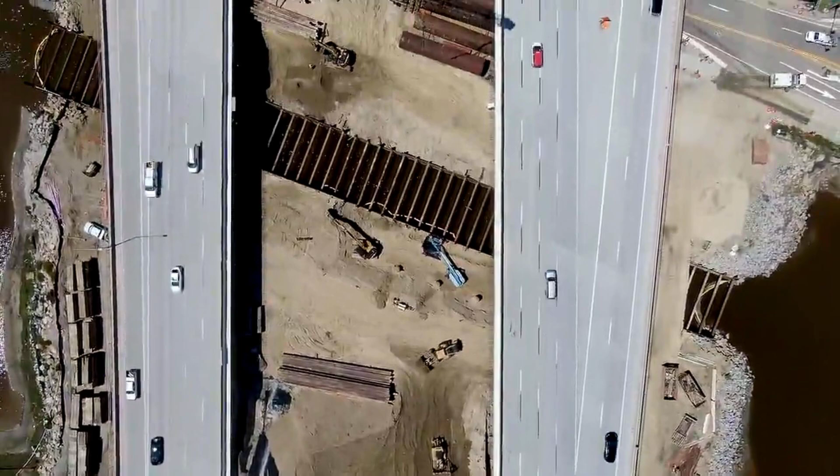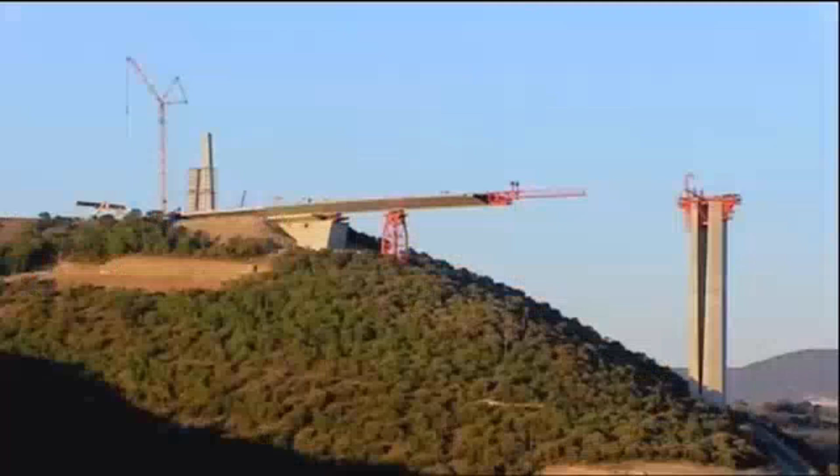America once built the world's longest bridges in just a few years, on time and on budget. Today, the same country takes decades and spends billions more, only to finish projects like the Bay Bridge almost 400% over budget, while Europe quietly delivers feats like France's Millau Viaduct with a fraction of the delay and cost. This isn't just a headline, it's the reality that shapes daily commutes, drains public funds, and leaves vital infrastructure crumbling.

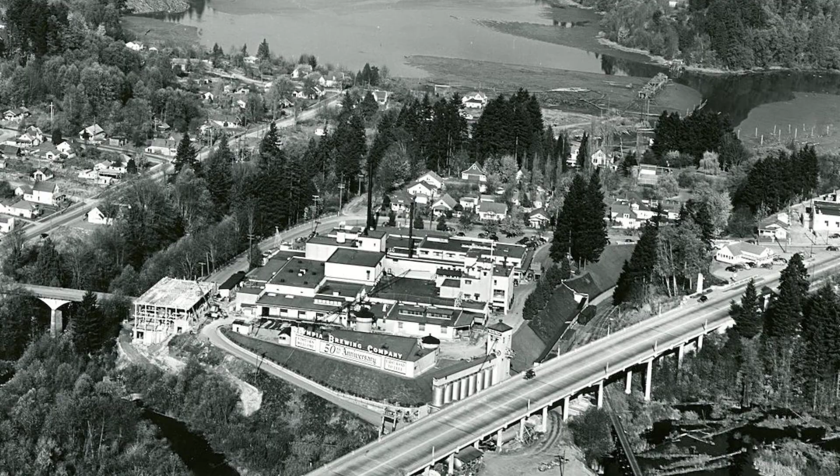So why can't America build bridges like Europe anymore? And what changed since its golden age? The real answer starts with a series of shocking comparisons, revealing a decline nobody expected.

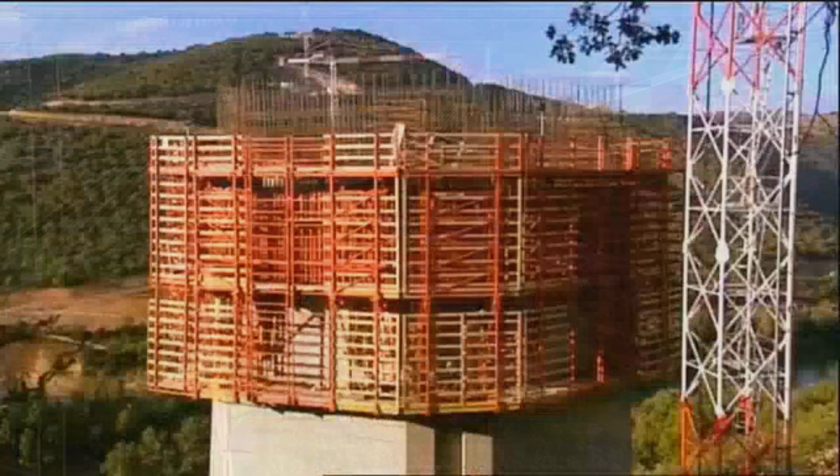Start with two bridges, both record-breakers in their own right. France's Millau Viaduct, the tallest bridge in the world, opened in 2004 after just 13 years from approval to completion. The final bill? About €394 million, just 10 to 15% above the original estimate.

Now look at the new eastern span of the San Francisco-Oakland Bay Bridge. Planning began in 1989. By the time it opened in 2013, the project had stretched to 24 years and ballooned to $6.5 billion, nearly 400% over the first budget. That's not a rounding error. That's billions of dollars and more than a decade lost.

This isn't just a fluke. European megaprojects like the Øresund Bridge, connecting Denmark and Sweden, finished on time and within budget after 5 years of construction. Meanwhile, American projects routinely run 50 to 200% over budget, with timelines measured in decades. The numbers tell the story. Where Europe expects a 10 to 20% overrun, the US faces cost explosions that can quadruple original estimates.

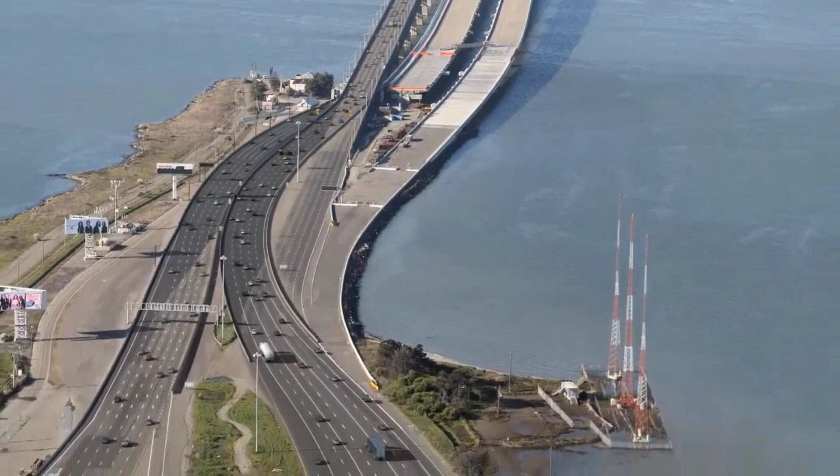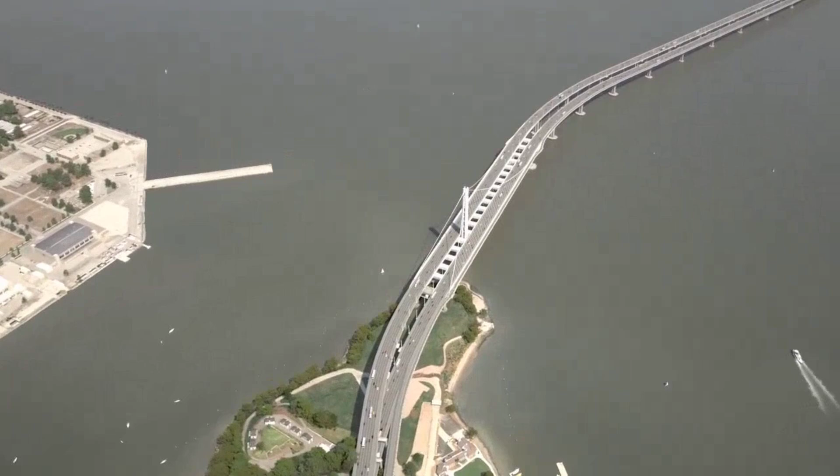For commuters, that means years of detours and delays. For taxpayers, it's billions spent for every mile of steel and concrete. The scale of the gap is hard to ignore. Two bridges, two continents. One delivers on time, the other delivers excuses and invoices. The question is, how did this gap open up, and why does it keep growing?

In the middle of the 20th century, American bridge builders set the pace for the world. The Golden Gate Bridge, spanning more than a mile across the churning waters of San Francisco Bay, opened in 1937 after just 4 years of construction. Its Art Deco towers and sweeping cables became a symbol of national confidence.

By the 1950s and 60s, the United States was pouring concrete and steel across rivers, valleys, and urban divides at a rate unmatched anywhere. Interstate highway bridges, like those crossing the Mississippi or the Ohio, often went from planning to ribbon cutting in as little as 3 to 5 years.

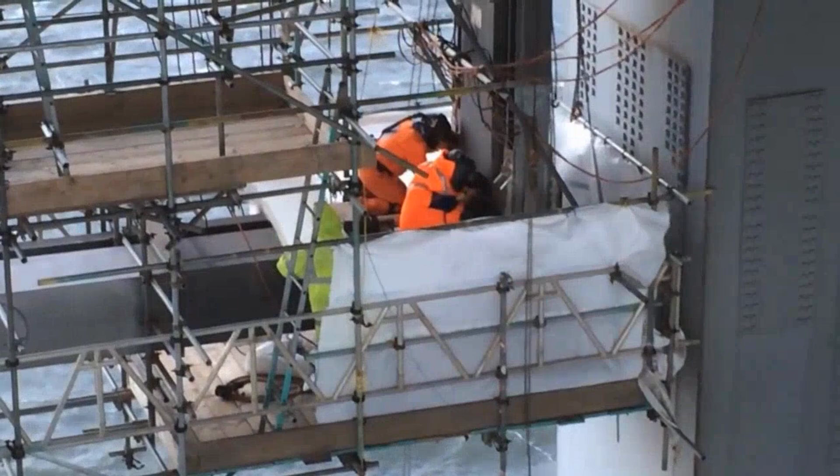Engineers and construction crews worked with a directness that seems almost impossible now. Designs were bold, timelines tight, and budgets usually held. The Brooklyn Battery Tunnel, the Mackinac Bridge, and hundreds of lesser-known spans rose in quick succession, driven by a sense of urgency to connect cities and regions.

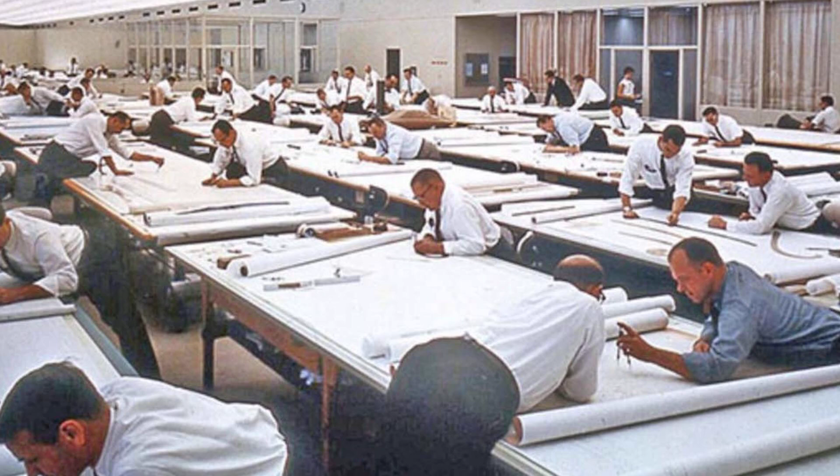State departments of transportation kept in-house teams of engineers and designers who saw projects through from concept to completion. Contractors drew on a deep bench of skilled trades, many trained on the job and eager to take on new challenges. Back then, the question wasn't whether America could deliver a bridge on time and on budget, it was how soon the next one would open.

The country's infrastructure ambitions ran on a kind of relentless optimism, powered by technical know-how and a willingness to take risks. That era now stands as a benchmark, a reminder that slow, costly delivery isn't a law of nature. For decades, America built fast, built big, and built well.

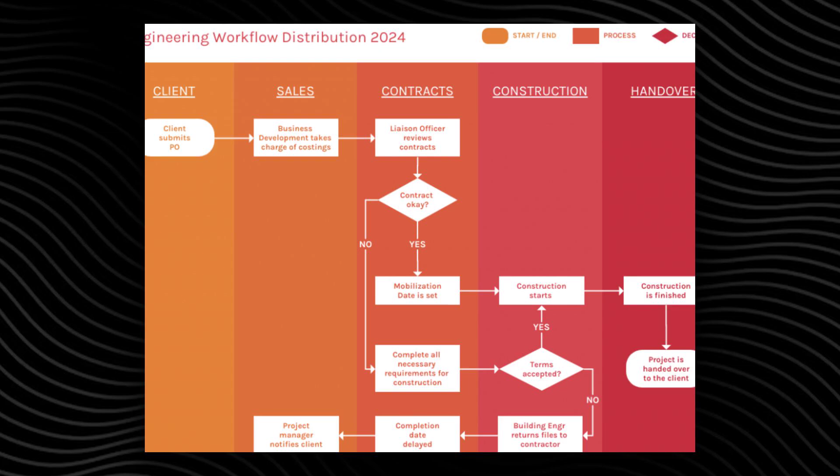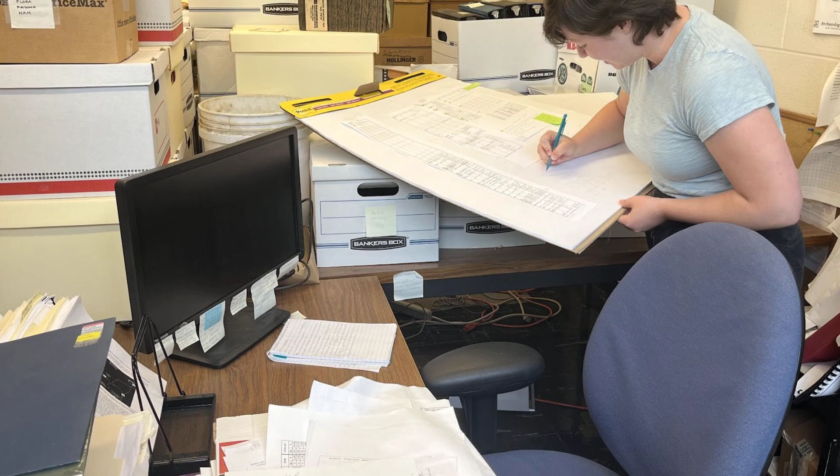Before a single crane arrives on site, most American bridge projects are already years behind. The first hurdle is the environmental review, an obstacle course of paperwork, hearings, and agency sign-offs. Under the National Environmental Policy Act, or NEPA, a full environmental impact statement can stretch across 4 to 7 years for a major bridge. That's before accounting for parallel reviews from the Army Corps of Engineers, the Coast Guard, state regulators, and local authorities. Each step adds more studies, more meetings, and more opportunities for delay.

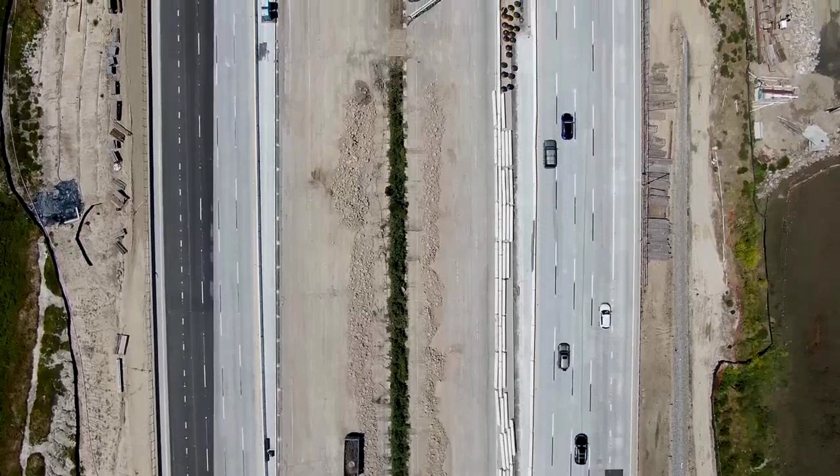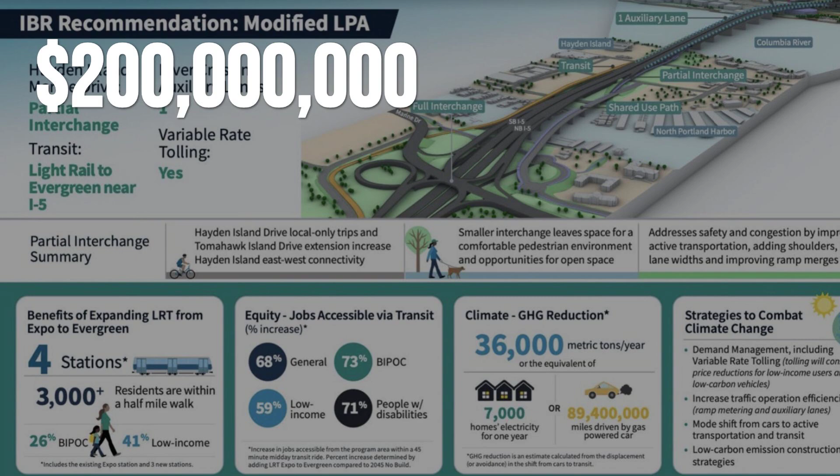A single lawsuit can halt progress for months or even years, as competing interests battle over route alignment, endangered species, or noise impacts. The Columbia River crossing between Oregon and Washington burned through over $200 million just on planning and environmental review, only to be derailed in court before a shovel hit the ground.

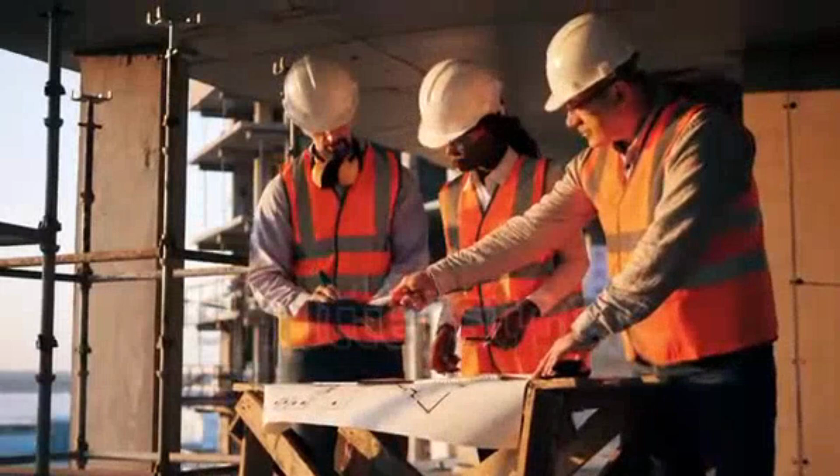In Europe, these reviews are bundled and time-limited, with a single lead agency shepherding the process. In the US, the process is open-ended, with litigation always looming. The result? Bridges wait in limbo while costs climb, and communities grow impatient for relief that never seems to arrive.

A bridge might be designed and approved, but the money to build it does not always flow when it is needed. In the United States, funding for major bridge projects comes in annual installments, controlled by Congress through the federal budget cycle.

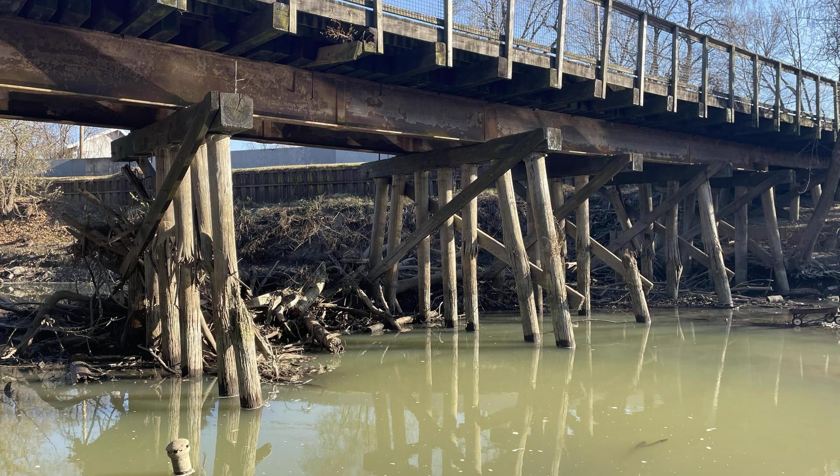Even with the $1.2 trillion Infrastructure Investment and Jobs Act, most bridge dollars are released year by year. A project can stall for months if Congress delays appropriations or budget fights hold up the next tranche of funding. For states and contractors, this means stop-start schedules. Crews ramp up, pause, and scramble to restart, with each break adding cost and eroding momentum. There's no guarantee the full amount will ever materialize, and overruns can pile up as projects stretch over multiple budget cycles.

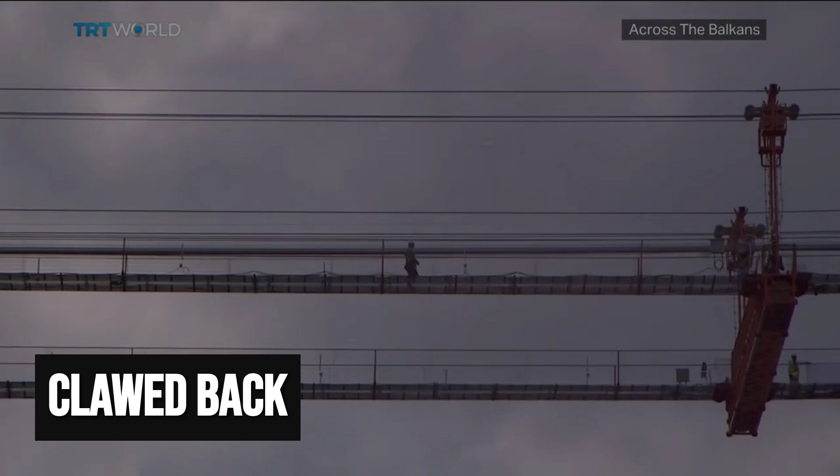Europe takes a different approach. The European Union's Connecting Europe Facility, for example, commits funds up front, tied to strict project milestones. If a bridge project misses a deadline, unused money can be clawed back and future support is at risk. In 2020, the EU withdrew funding for Danube bridge upgrades after progress stalled, enforcing a use-it-or-lose-it rule. This system keeps projects moving and holds planners accountable.

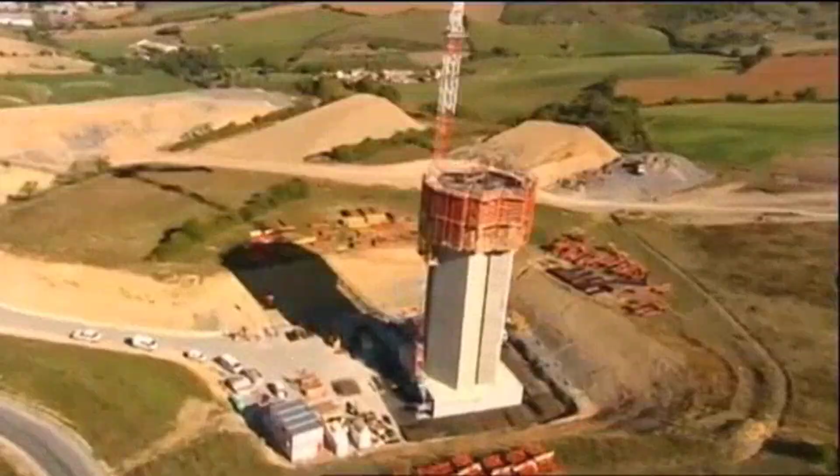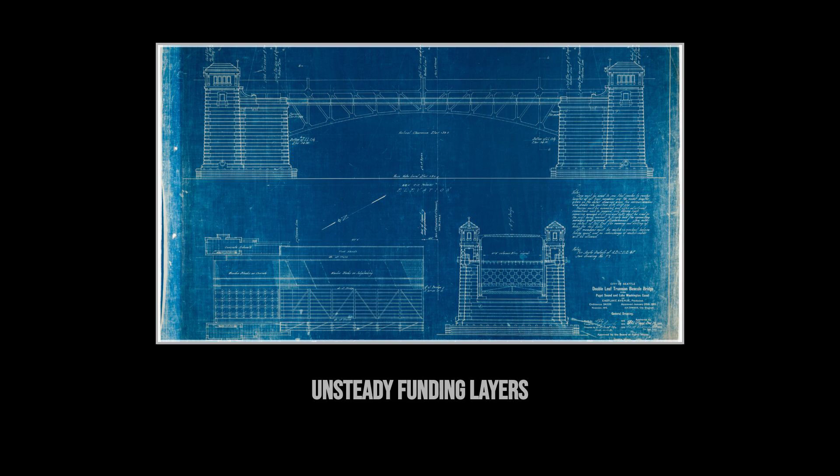In the US, without hard penalties for delay, projects can drift, waiting for the next budget, the next vote, or the next round of paperwork. The result is a funding fault line that runs beneath every American bridge plan, making steady progress the exception, not the rule.

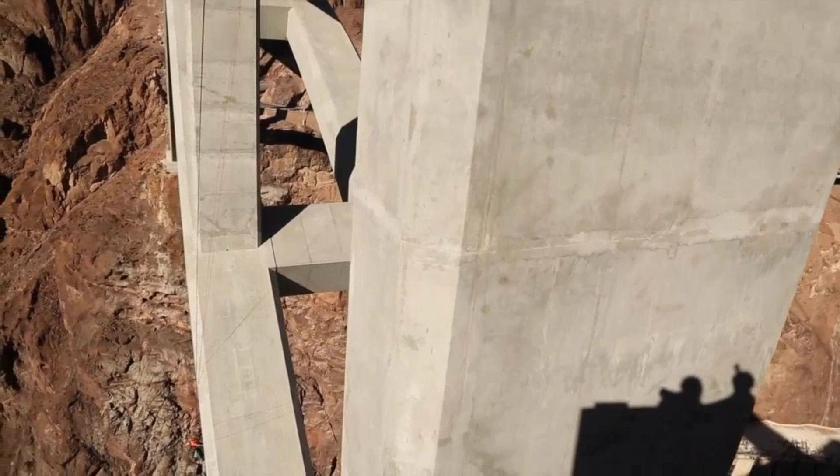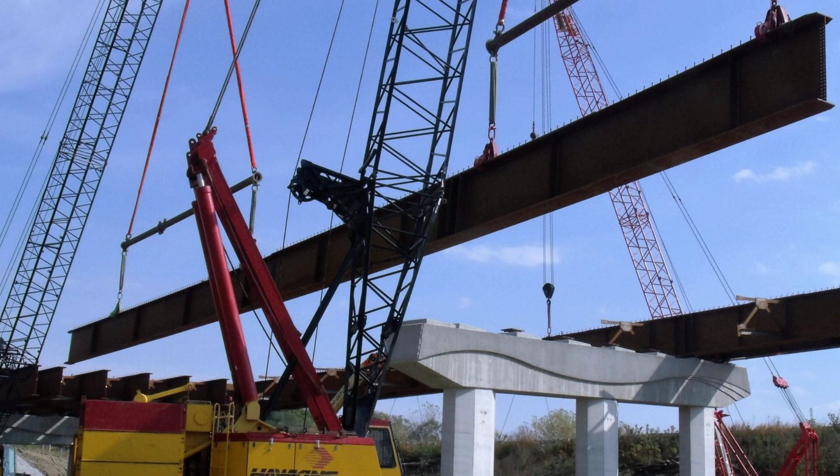Engineers on American bridge projects face a different set of hurdles before the first beam is even set. Over the last 50 years, safety codes and design standards have ballooned in size and caution, pushing teams to add more steel and concrete than their European peers. It's not just about building strong bridges, it's about building bridges that can withstand any imaginable lawsuit or audit. Contractors and engineers widely report that these layers of risk-averse requirements can drive up material use and costs by double digits, even when the added bulk brings little practical benefit.

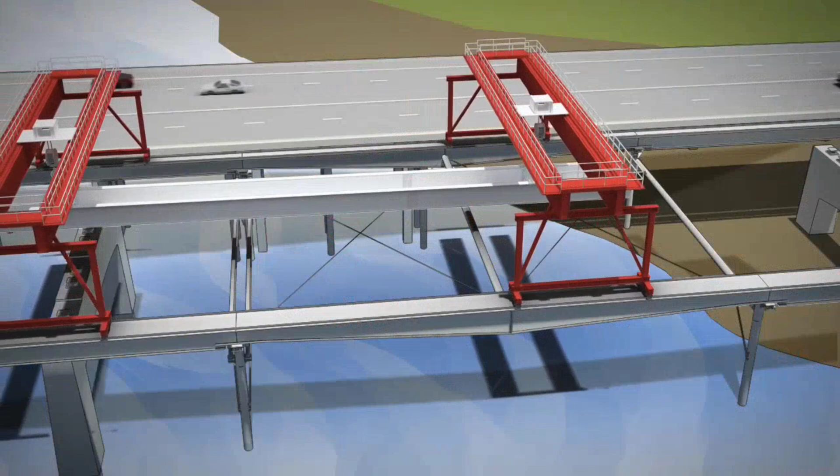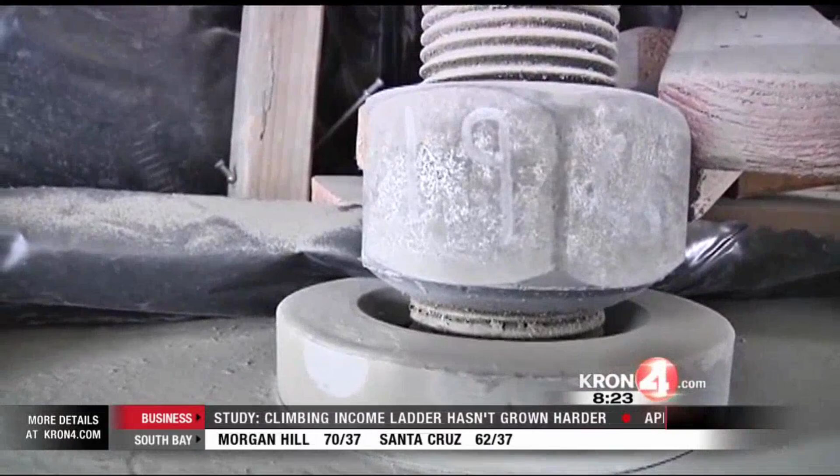But the challenges don't end at the drawing board. The workforce that once made America's bridge boom possible is aging out, with fewer young tradespeople stepping in to fill the gap. Recent industry surveys show that most construction firms are struggling to hire enough qualified welders, carpenters, and crane operators. On top of that, the US often relies on imported steel for major projects, which can mean months of waiting for shipments to clear customs or pass quality checks. When problems crop up overseas, as they did with the Bay Bridge's cracked welds, delays and costs spiral at home.

Even after the design is finalized and the team is in place, a single bridge project may need sign-off from a dozen or more agencies, federal, state, city, and sometimes tribal. Each approval can mean more revisions and more time lost. For the engineers and crews trying to keep a project on track, it's a marathon of paperwork, compliance, and coordination. All these small hurdles add up, making it harder to deliver the kind of bold, efficient infrastructure that once defined American ambition.

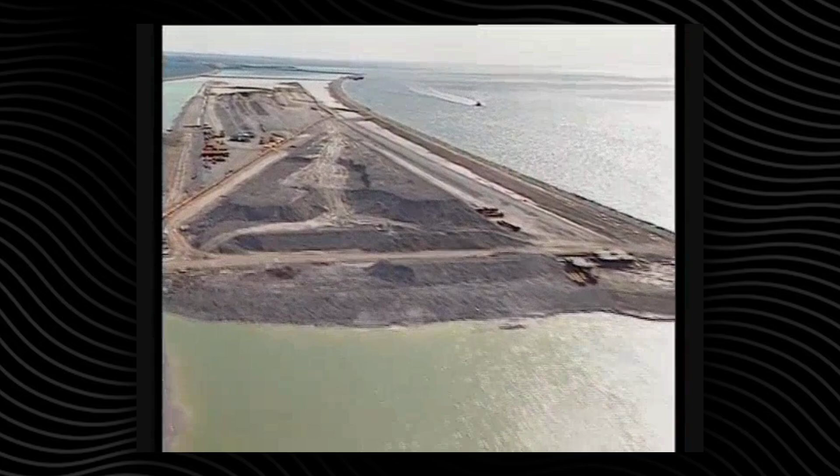The Øresund Bridge stands as a rare achievement in modern megaproject delivery. Built to connect Denmark and Sweden, it opened to traffic in July 2000 after just 5 years of construction. The final cost landed within 1% of the original budget, a result almost unheard of on projects this scale. A binational authority handled every phase, streamlining decisions and keeping the project insulated from political swings. Contracts were structured to reward speed and penalize delay, so every partner had a stake in finishing on time. The result? A seamless rail and road link that delivered exactly what was promised, exactly when it was needed.

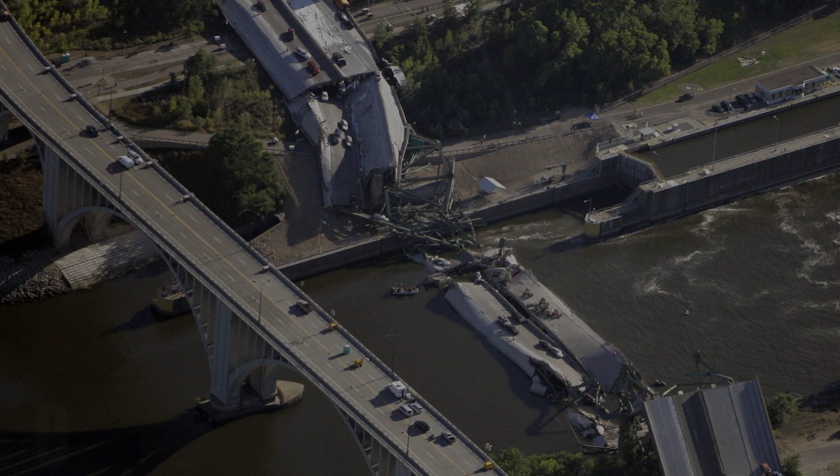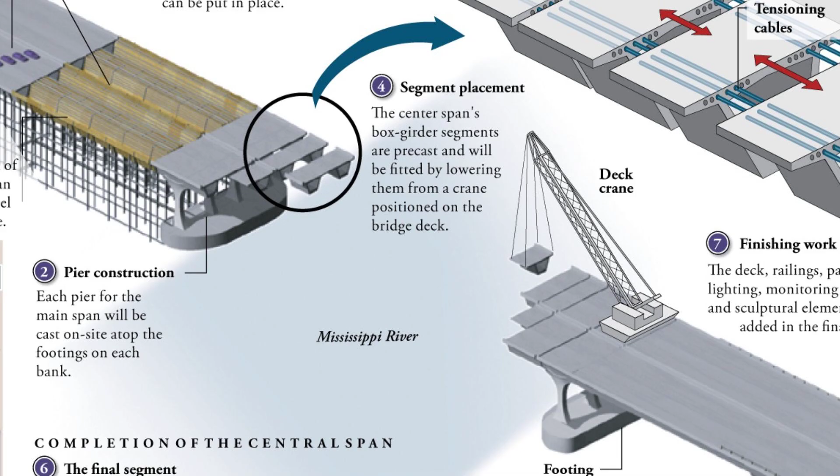When the I-35W bridge in Minneapolis collapsed, Minnesota rebuilt it in just 11 months, faster than anyone expected and under budget. That success wasn't luck. It came from clear leadership, streamlined approvals, and a contract that rewarded speed.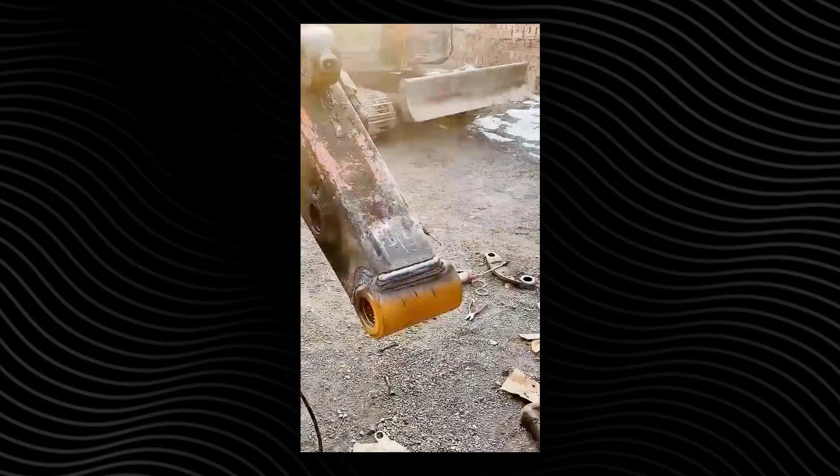Across the country, new task forces are cutting red tape by putting engineers and agencies at the same table from day one. Public-private partnerships are delivering bridges like the Goethals and Presidio Parkway early and on budget. Apprenticeship programs are bringing in new skilled workers, raising completion rates, and keeping the next generation on the job. These reforms show that America can still build quickly and well when the right tools are put to work.

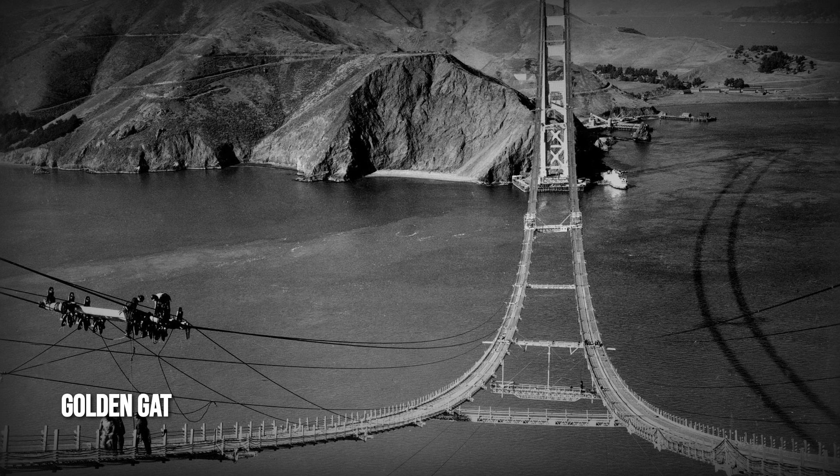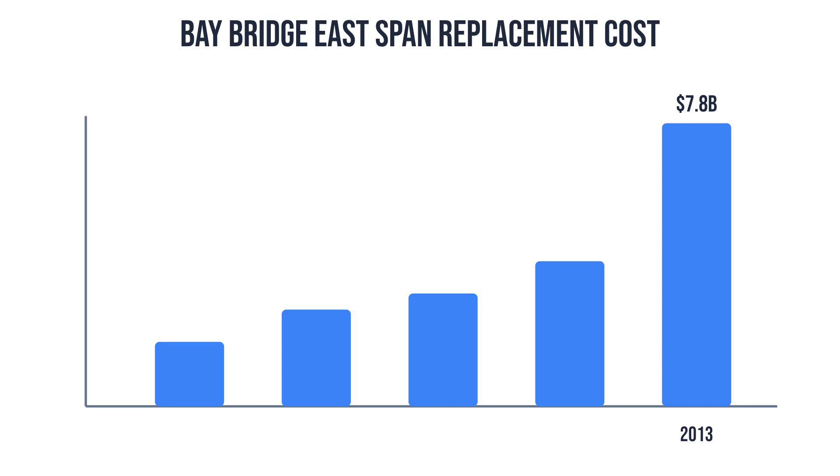In 1937, the Golden Gate Bridge opened after just 4 years of construction, setting a global benchmark for speed and ambition. Today, American bridge projects like the Bay Bridge routinely face cost overruns of 200% and delays spanning decades, while European examples such as the Millau Viaduct deliver on budget and on time, with overruns rarely exceeding 15%.

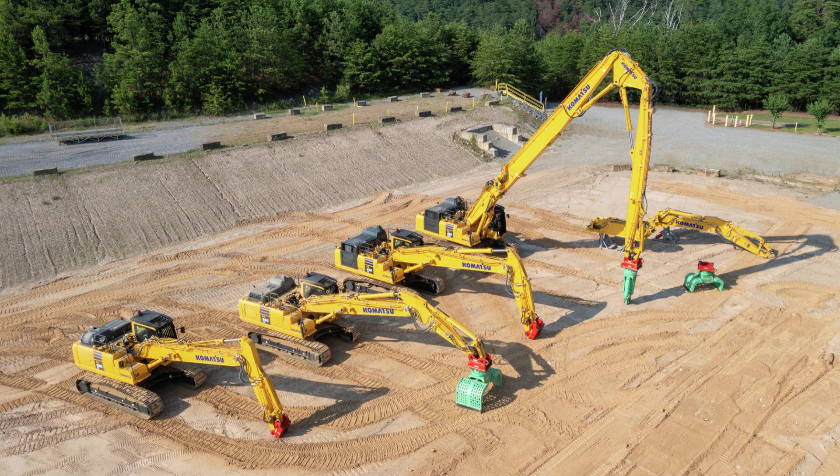The evidence points to a combination of regulatory gridlock, fragmented funding, risk-averse engineering, and workforce shortages as the main drivers behind America's decline. Yet not every answer is clear. Some government audits remain sealed and the full impact of recent reforms is still unknown. What is certain: streamlined approvals, integrated funding, and investment in skilled labor have enabled Europe's continued success.

As new infrastructure laws take effect, America stands at a crossroads. Whether it can reclaim its lost edge depends on choices made now, not on past achievements.